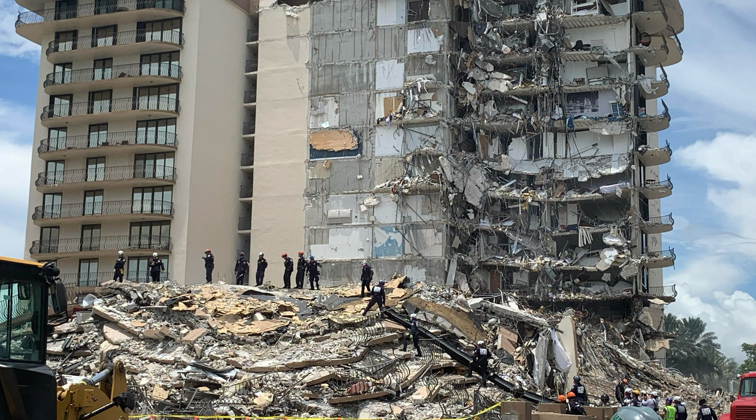Shortly after 1 a.m. on June 24, 2021, the middle and east parts of the Champlain Tower South condominium in Surfside, Florida, collapsed. Only the west part of the tower remained standing. 98 lives were lost in this tragedy.

The 136-unit condominium building stood 12 stories tall plus a penthouse, and it was built of steel-reinforced concrete. At ground level, a pool deck and a parking deck made up of concrete slabs were supported by columns over the basement of CTS. The building had stood on this stretch of the Atlantic coast since 1981. There was no obvious cause of the collapse, such as an explosion or a storm.

Within days, the National Institute of Standards and Technology launched a National Construction Safety Team investigation to determine the technical cause of the collapse. I'm Judith Mitrani-Reiser, co-lead of the investigation. And I'm Glenn Bell, co-lead of the investigation. In this presentation, we will provide a summary of our technical findings.

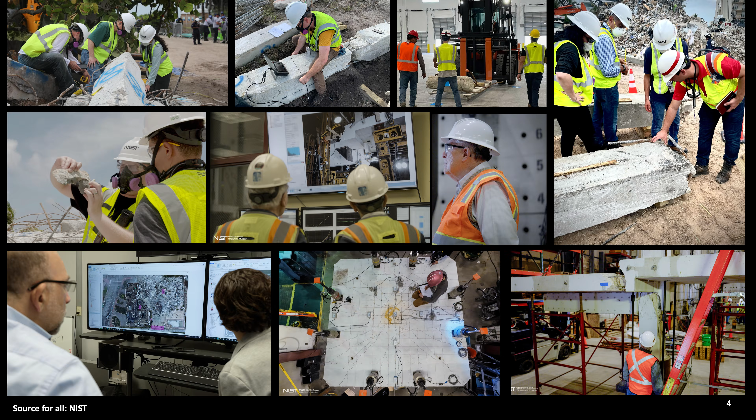Our team of experts has completed the technical portion of its investigation. This includes the analysis of physical evidence and historical records, as well as extensive interviews. We conducted materials testing and geotechnical studies. We built and tested building components like those within CTS and ran many computer simulations of the failure. We examined 24 possible scenarios for where and how the failure started.

Based on this extensive work, we have concluded that the failure most likely began in early June, about 3 weeks before the collapse, when two connections between garage columns and the pool deck slab failed. Once the first connection failed, other elements of the pool deck were left to carry their loads. But they were not strong enough to handle them due to problems that stemmed from the original design and construction of the building.

When building structures are designed and built to required codes and standards, they have margins against failure, meaning they should be able to support much more load than they are expected to bear. In the case of Champlain Tower South, these margins against failure were too narrow from the start.

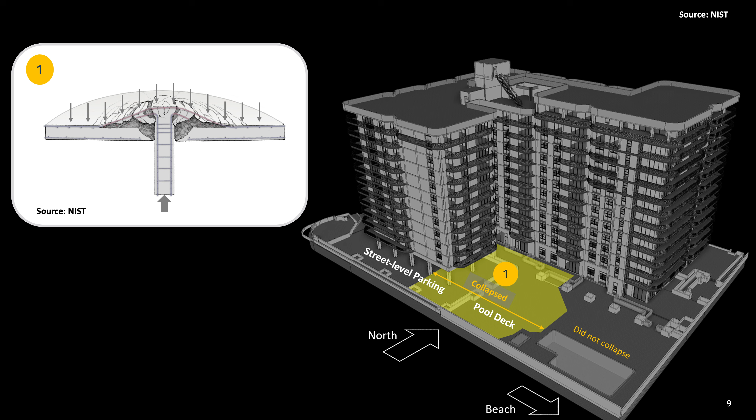NIST investigation revealed that the collapse of Champlain Tower South began with what are called punching shear failures. In this type of failure, the slab breaks around the column, giving the appearance that the column punched through it. It occurs when the load on the slab becomes great enough to cause it to bend and crack around the column, weakening the connection that is holding the slab in place.

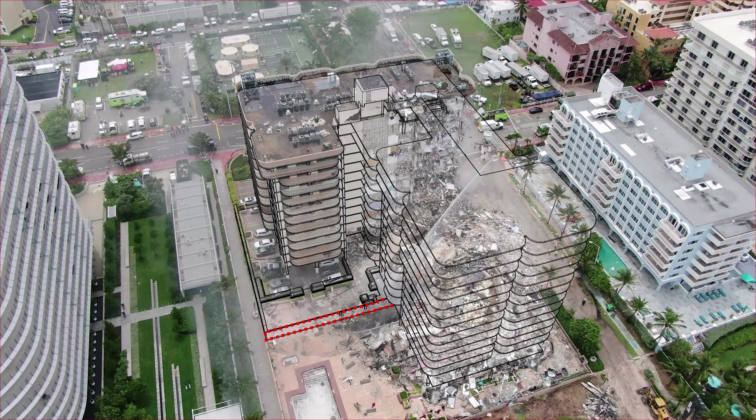After the first two slab column connections failed in early and in mid-June, respectively, the slab that they supported did not fall immediately. It was held up by the pool deck and street-level parking deck slabs surrounding it. When the connections between the pool deck slab and these two columns in the garage below failed, it increased the loads on neighboring connections, eventually causing them to fail as well.

The failure spread to other elements of the pool deck and street-level parking structure, eventually unseating the southern edge of the pool deck slab from a supporting wall. We believe this caused the slab to sag further and eventually break away from the face of the middle section of the tower, seen at the extreme right of this image. This left the slab resting completely on crushed cars and the garage floor below it.

There's no way to know precisely which path these failures took from the initial two punching shear failures, but this scenario we have described here is consistent with principles of structural mechanics, eyewitness accounts, and other evidence. Small variations in the sequence could also be consistent with structural mechanics and evidence.

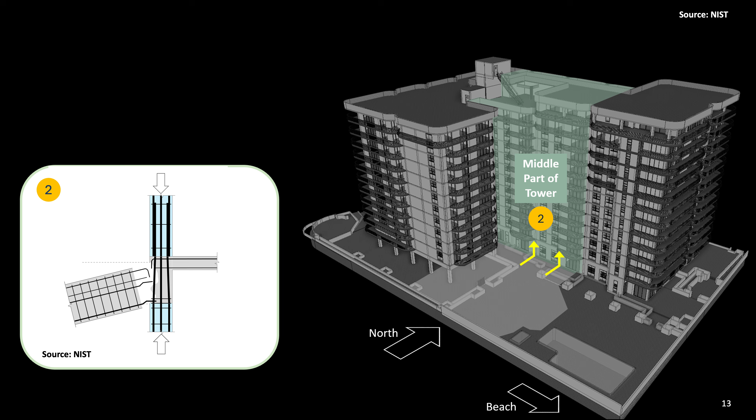Most importantly, when the pool deck broke away from the middle part of the tower on June 24, 2021, it damaged two connections. The damage weakened these joints, causing the failure to enter and spread through the middle part of the tower. Once the failure began in the middle part of the tower, it caused what's called a progressive collapse in the tower. The collapse progressed through the middle part of the tower and then to the east part.

Low margins against failure existed from the time Champlain Tower South was built, primarily caused by two factors. First, severe and widespread deviations in the building's original structural design from the codes and standards of the day, but also some limitations in those codes and standards. And second, deviation in the building's construction from the design drawings. Loads added to the structure over its life further diminished the margins against failure.

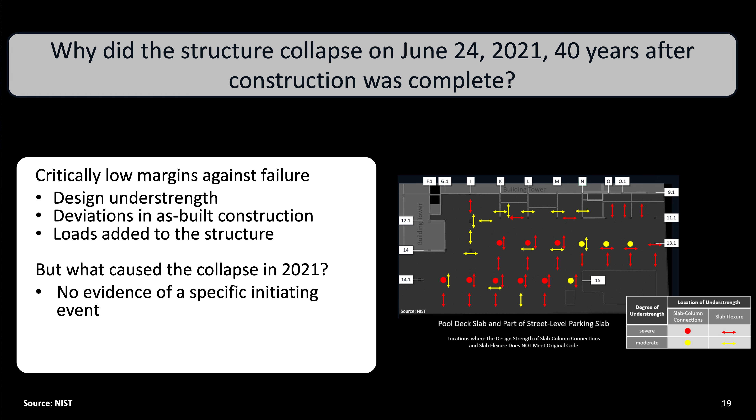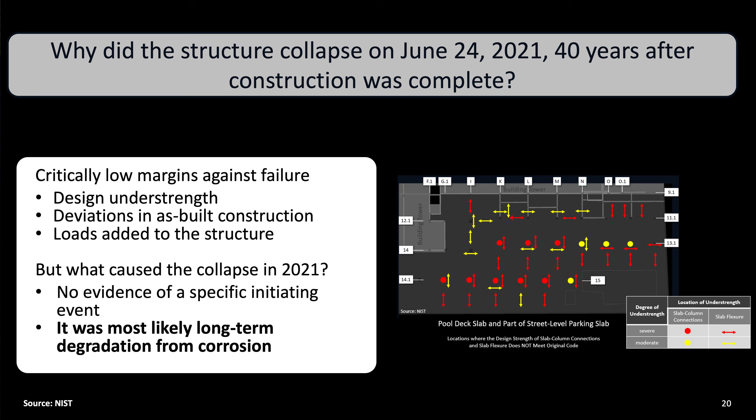But what caused the collapse in 2021? We found no evidence of any specific initiating event. The final factor that brought the critically low margins of safety to the point of failure was most likely long-term degradation from corrosion. While we have determined the cause of the collapse, our work is not done.

We continue to develop recommendations to improve the structural safety of buildings based on what we've learned. We will publish a report, as we have done for our previous investigations, which will include all of the technical analyses and our recommendations. We will then work to ensure that standards, codes, and practices are updated as needed.

Throughout this investigation, we have kept top of mind those who were most directly impacted by the collapse of Champlain Tower South. We appreciate everyone who has helped with this work, including the survivors and the families of those who were lost. With their invaluable input, this effort will help make other buildings safer and help prevent tragedies like this from happening again.

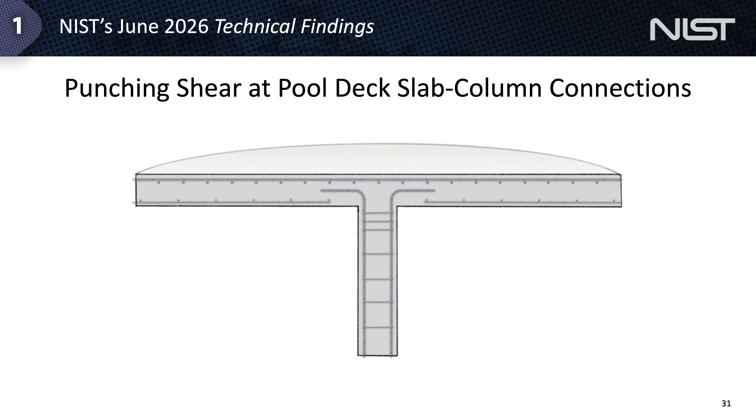I will now describe this type of failure with an animation. The first image shows the column supporting the slab. As the slab is loaded and the column resists the load, the weight of the slab and other things on it push the slab down. The column resists that load by pushing up.

The slab bends down around the column, opening diagonal cracks. As the load increases, one or more of the cracked surfaces widens to the point where it can no longer resist the load, and the joint fails. It loses most of its strength.

If other slab column connections adjacent to the failed connections have not failed, the adjacent columns may keep the slab from falling, as shown here. This was the case in the first connection failures I've described so far. But if there isn't support for the slab through adjacent connections, the slab will drop. It is as though the column punches through the slab.

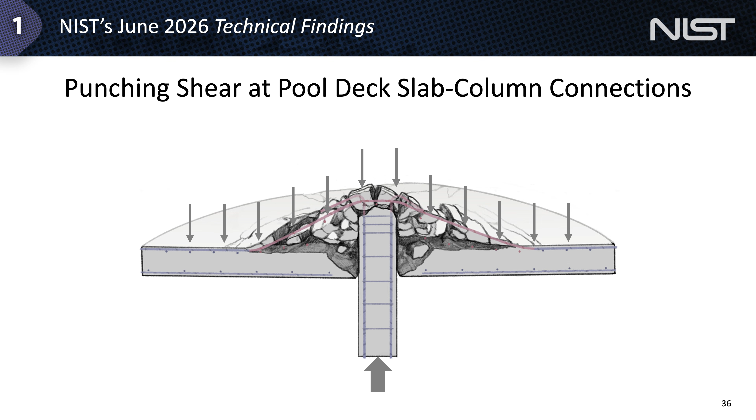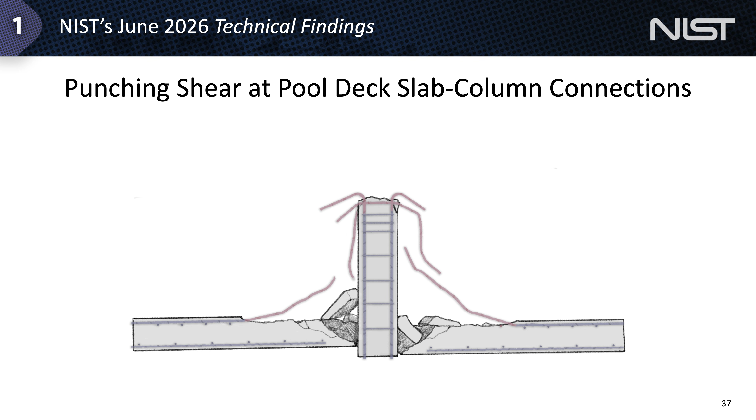The slab slides down the column, and as the slab slides down the column, the top layer of the slab reinforcement pulls down on the failure cone over the column, breaking it, and the concrete breaks apart as the slab continues to drop, until finally the slab drops to its final resting place. As the slab drops, the top reinforcement breaks the failure cone over the column, leaving the column's top and the hooked shape reinforcement as shown here.

When structural elements and connections are designed and built according to applicable standards, they are expected to have a large margin against failure, meaning that the expected failure load and deformation is well above the loads and deformations that are expected to occur in service.

But in the pool deck slab column connections of CTS, those margins against failure were 0 at the time of failure. After these two slab column connections failed in early June and by mid-June, the slab around these connections was able to remain standing for some time through a combination of bending resistance in the slab and flat arch action, technically called compressive membrane action. This behavior prevented immediate collapse.

However, when the first two slab column connections failed, the loads on neighboring slab column connections increased, causing them also to fail on June 24, 2021.

The failure spread through a large portion of the pool deck and adjacent street-level parking deck. I will now present a likely scenario of how failure could have initiated and progressed at CTS.

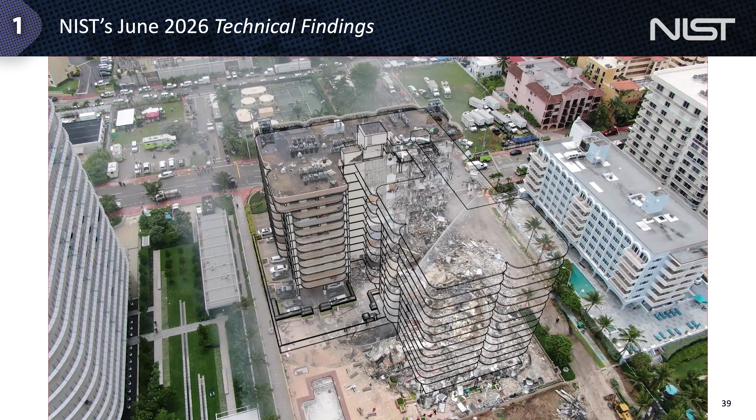The animation opens with this image of the collapse site, overlaid with an outline of the pre-collapse building shown in black. We highlight in red a slice of the pool deck and garage that we'll use as an example to demonstrate a scenario of the initiation and progression of failure. The scenario is consistent with principles of structural mechanics, eyewitness accounts, and other evidence, but it is not the only such scenario. There are other progression scenarios that are consistent with structural mechanics and the evidence.

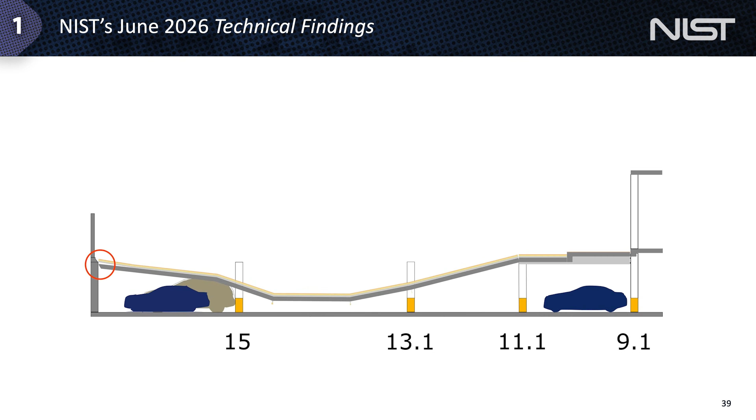We then zoom into the elevation view of the slice, showing an initial punching shear failure at grid line 13.1 and the sagging of the slab that follows. The failure spreads to neighboring slab column connections shown here occurring at grid line 15. In this scenario, the sagging grows, eventually unseating the southern edge of the pool deck slab from the wall, and then causing punching shear failures at slab column connections at grid line 11.1, which are strengthened by beams.

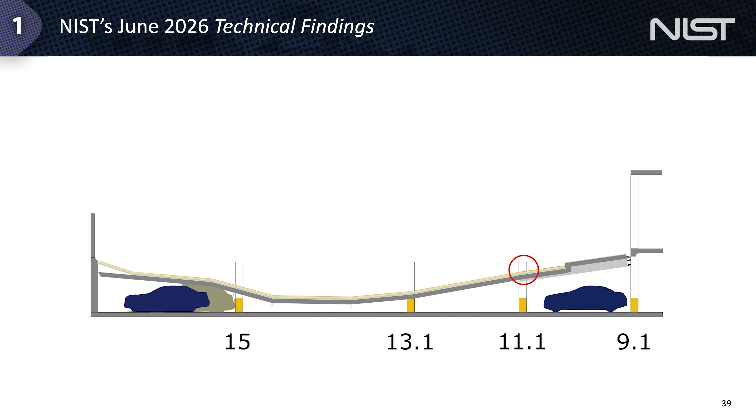The failure continues to spread north until it reaches the southern face of the tower, where sections of the concrete are pulled from the connections between the pool deck slab and the column towers. In this scenario, the slab ultimately rests completely on crushed cars and the garage floor below it.

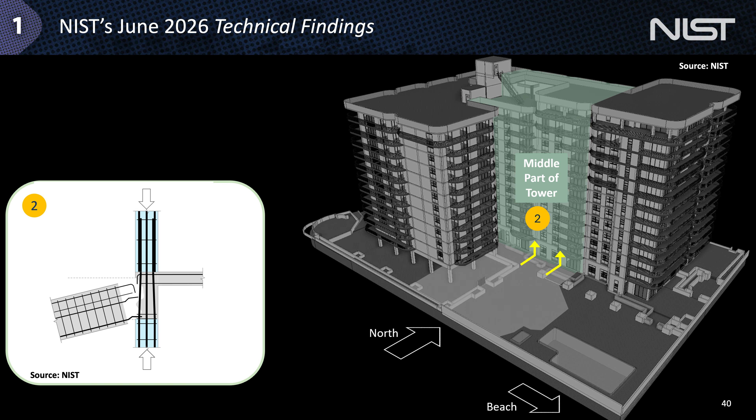When the pool deck slab and beam fully disconnect at its northern edge, where it meets the middle part of the tower shown here in green, it severely damages two critical structural connections where the pool deck slabs and beams join the columns and slabs of the tower. The damage weakens these joints, causing the failure to progress into the tower, shown with the two yellow arrows, and then spreading through the middle part of the tower in the area marked 2.

The downward movement of the collapsing floor slabs of the middle section of the tower pulls the east section toward the middle, causing the east section to sway back and forth. This swaying is initially restrained by a portion of the middle section of the tower. However, continued collapsing of the middle section allows the east section of the tower to sway westward until the capacity of the lower story columns is exceeded, and this section of the tower begins to fall downward.

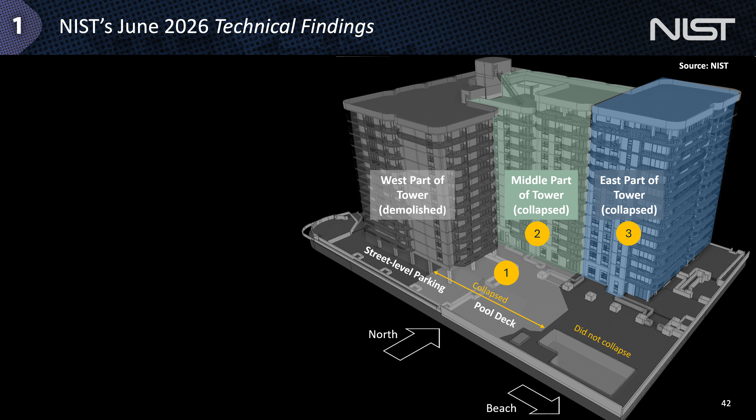Our team's meticulous studies of the physical evidence we collected, the observations shared by eyewitnesses and those familiar with the building, and the testing and the results of computational structural analysis has led us to determine the following most likely failure scenario for Champlain Tower South. First, the building suffered punching shear failures of slab column connections of the pool deck approximately 3 weeks, and then again 1 week before the tower collapsed.

The initial slab column connection failures eventually cause additional slab column connections to fail, causing a progression of collapse of parts of the pool deck and the street level parking, eventually unseating the pool deck slab at its southern edge.

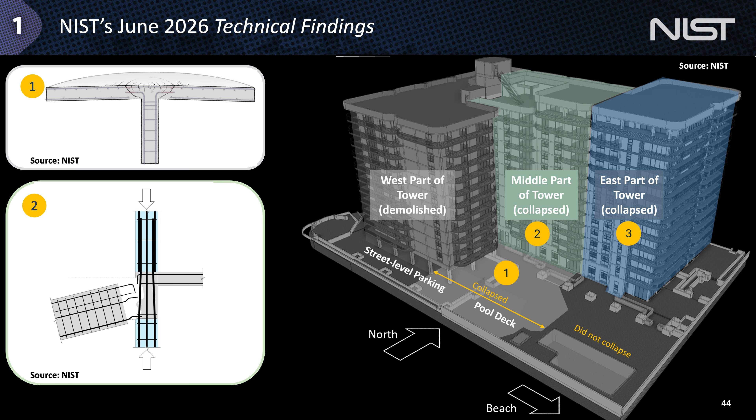And second, this failure damaged two critical joints where pool deck slabs and beams joined columns and slabs of the tower at the northern edge of the pool deck. The damaged connections crushed due to the loads on the columns, causing two tower columns to drop, and the failure to spread throughout the middle part of the tower. And finally, those failures progressed through the east part of the tower.

The next few chapters of our presentation will show how our team determined this most likely failure scenario and why Champlain Tower South tragically collapsed on June 24, 2021. We will describe the initiation and progression of failure of Champlain Tower South in three distinct chapters shown here.

Chapter 2 is focused on the initiation of failure of slab column connections in the pool deck and the progression of this failure through a large part of the pool deck slab and the street level parking slab. Chapters 3 and 4 are focused on progression of the failure into and through the middle and east parts of the tower and arresting at the west part of the tower. Chapter 2 will now address the failure initiation.

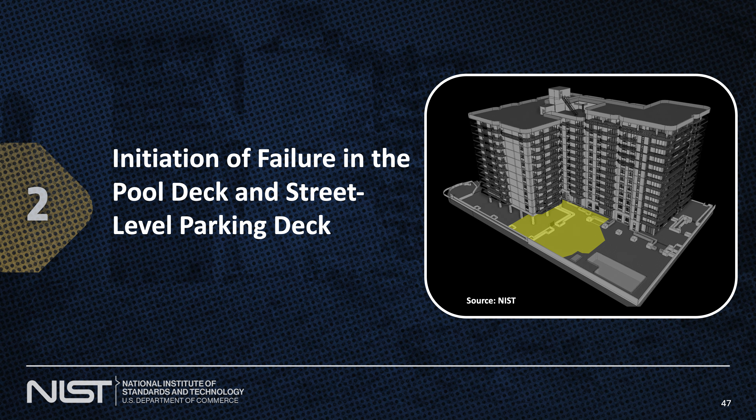In early June 2021, just 3 weeks before the failure of Champlain Tower South, eyewitnesses saw and captured in photos severe distress in a masonry planter wall and a planter box sitting on the pool deck. The location of this distress is shown on the left with a blue dot and arrow. The photo in the upper right shows distress 3 weeks before the building collapsed, including a long horizontal crack in the planter wall, identified here with a blue arrow. An enlargement below shows severe distress and displacement in the corner where the planter wall meets the planter box. Another photo of the same planter taken 14 months before this photo shows no distress. Therefore, significant movement occurred during this time period.

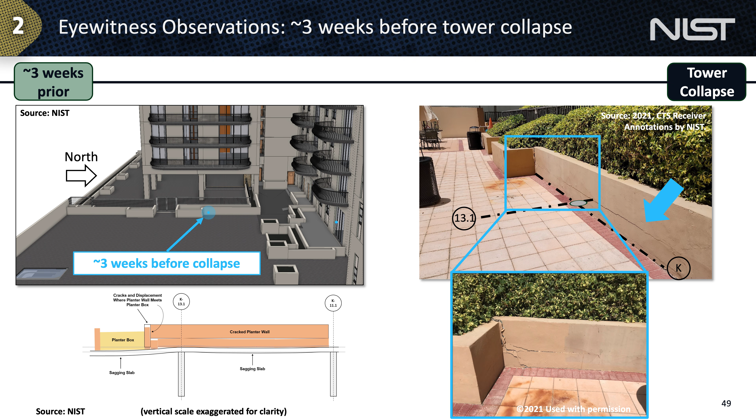The image in the lower right is an artistic rendering of what the eyewitness described to us. They reported that the northern portion of the gate shifted down vertically relative to the southern portion by less than half an inch. This view and subsequent similar views show parts of the pool deck structure, its slab column connections, and the basement columns.

At A, we see the slab column connection at grid point K13.1 near where that planter and gate were damaged. Our analysis of the building's design and its condition at the time of collapse, our testing and computational modeling of the structure, and the damage observed by eyewitnesses and documented in photographs indicates a punching shear failure at point A. The video clip in the lower left side is the same video shown earlier and demonstrates a likely scenario where the slab sags after the slab column connection failure.

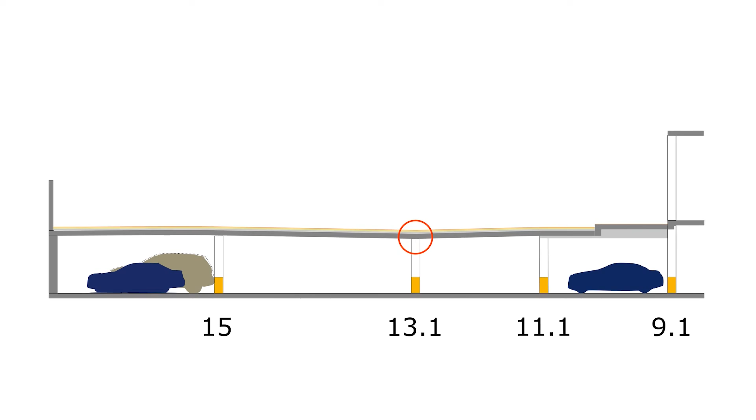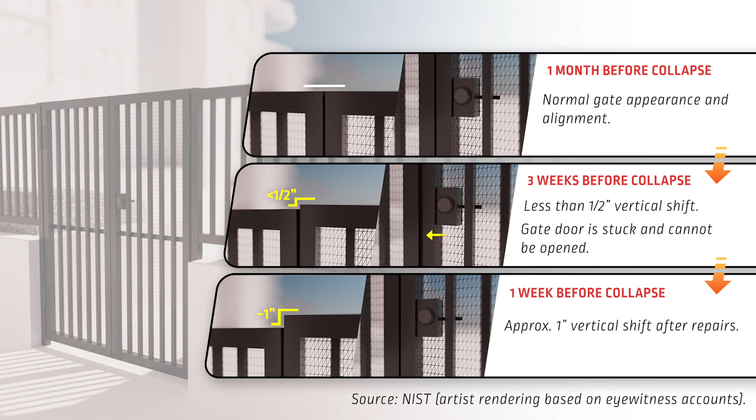Approximately 1 week before the collapse, an eyewitness reported a recurrence of the problem with the gate between the pool deck and street-level parking, which had again become jammed and unusable. The location of this distress is shown with the blue dot and arrow in the left-hand image. The eyewitness reported that this time the gate suffered a more significant vertical displacement downward. The northern portion of the gate displaced vertically down by approximately 1 inch relative to the southern portion of the gate. This observation is significant because this gate is adjacent to the planter box that, in the same period of time, showed severe distress and displacement prior to the failure on June 24, 2021.

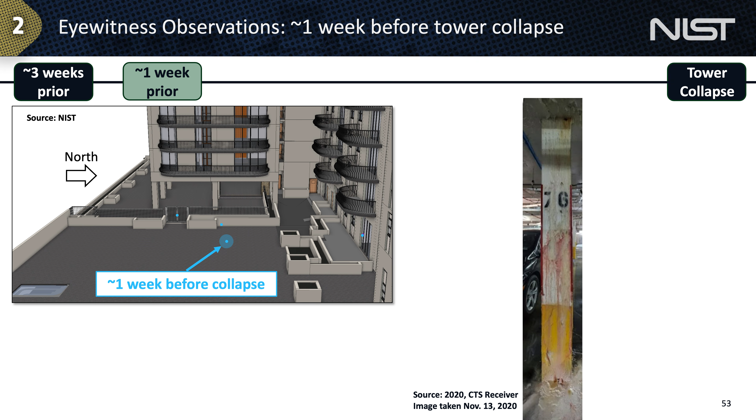Approximately 1 week before the tower collapsed, an eyewitness described the persistent water leaks in the ceiling of the garage drying up, and a sudden concentration of water began to flow down on all 4 faces of the column located due east of the planter that suffered damage just 2 weeks before. The location of this column at grid point L13.1 is shown with a blue dot and arrow in the left-hand image. The eyewitness shared that the flow of water increased daily and that there was a change in the height of the ceiling of the parking garage or the pool deck slab around the column.

After the 2 slab column connections punched 3 weeks and 1 week before the tower collapsed, the slab near the punched slab column connections did not immediately fall into the basement, but instead they moved downward likely 1 or 2 inches at the 2 points labeled A. The slab area shaded in gray was able to transfer the load borne by the punch connections labeled A to adjacent columns, shown here in orange and circled in the figure. This prevented an immediate collapse of the pool deck slab.

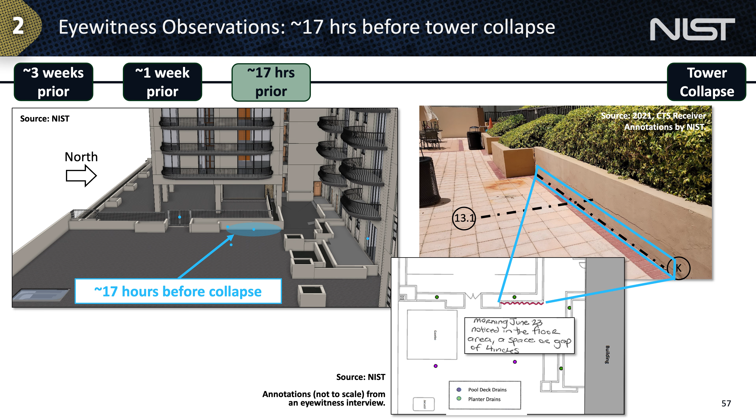The lower image is a drawing, not to scale, from the interview with the eyewitness, where the approximate location of the planter separation from the pool deck slab is shown with the pink line, and where the handwritten notes summarize the observation. Approximately 9 hours before the tower collapsed, one eyewitness described a leak coming through a crack in the garage ceiling that got progressively worse.

The eyewitness described the water leak had started as a drip, and that the bottom of the slab on the east side of the crack was lower than the west side.

The area where this leak formed is in a part of the garage that historically leaked and was repaired over the years. The lower image is a drawing, not to scale, from the interview with the eyewitness.

In summary, eyewitnesses observed damage to the planter box and the gate near grid point K13.1 approximately 3 weeks before the collapse. Two weeks later, more severe damage is again observed in the gate separating the street-level parking and the pool deck, and water is observed being funneled down the column at grid point L13.1.

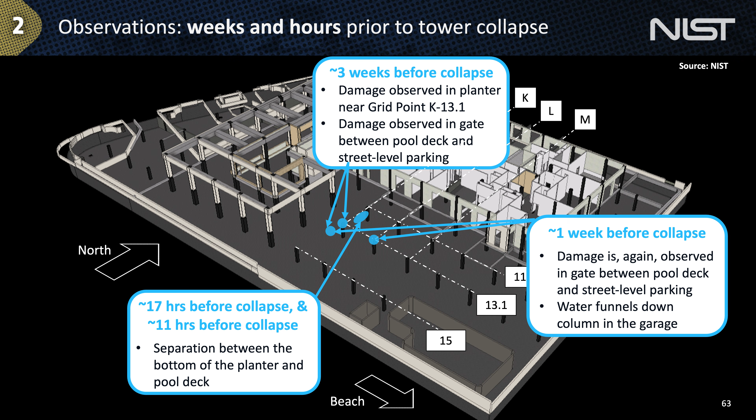Then 17 hours before, and again 11 hours before the collapse, one eyewitness notices a separation between the planter and the pool deck. Then 9 hours before the collapse, a water leak is observed in the garage. This leak worsened and was described as a faucet pouring water into the garage just 3 hours before the tower collapsed.

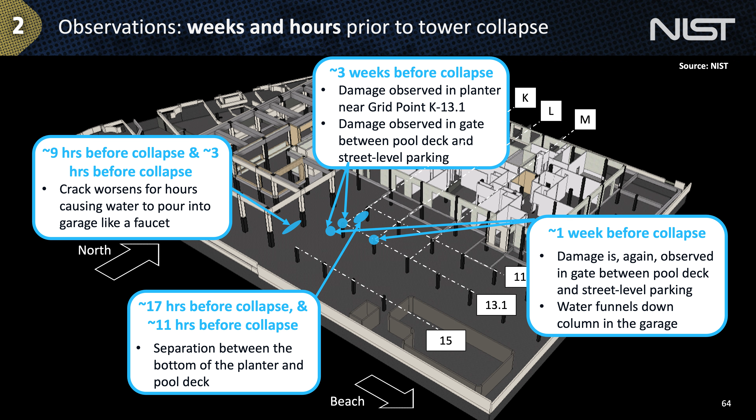Any fallen slabs in the garage would have been observed by any of the eyewitnesses who walked in this part of the garage. However, none of the eyewitnesses in the garage and other parts of the building observed fallen pool deck or street-level parking deck slabs 9 minutes before the tower collapsed.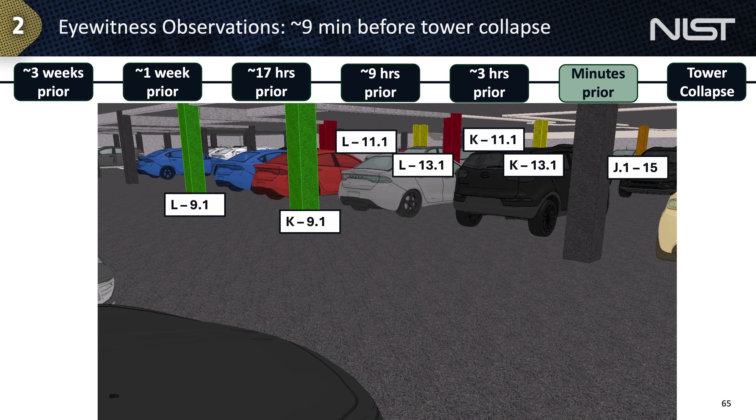Instead, several eyewitnesses reported hearing concerning sounds approximately 8 to 9 minutes prior to the tower collapsing. These sounds, heard from various locations in the building, are described as crackling sounds or as sounds associated with building renovations.

Approximately 7 minutes before the tower collapsed, the building's own fire alarm logged a trouble signal, with no further description or details in the log.

At approximately 6 minutes prior to the tower collapsing, several eyewitnesses, some already awake and some awakened by the activity in the pool deck area, saw the street-level parking collapsing or fully collapsed. One eyewitness described seeing the cars at the street-level parking deck in a strange position, almost as if they were tilted down. Prior to observing the cars, one eyewitness heard metallic screeching sounds, possibly associated with the cars shifting.

Another individual observed the street-level parking collapsed into the garage. Several individuals recalled hearing car alarms going off around this time.

The aggregated areas visible to all individuals who reported witnessing the collapsed street-level parking is shown in green. It is possible that the slab was progressively collapsing east of the street-level parking deck, but no eyewitnesses had lines of sight that far east during this time.

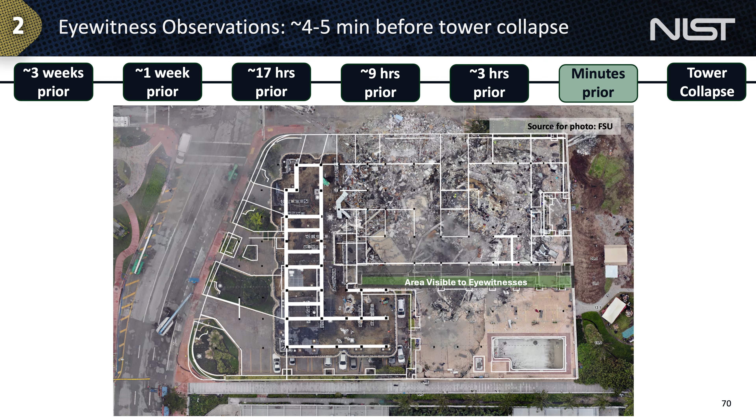The video shows the slab and beams tugging at the joints of the slabs, beams, and columns at E, and eventually the slab and beams breaking off these joints and pulling some of the joint concrete away with it. The video also shows how this scenario is consistent with multiple eyewitness accounts, indicating the pool deck collapse generally proceeded from south to north.

There is no way to know precisely which path these failures took from those initial two punching shear failures, but the scenario we have described here is consistent with principles of structural mechanics, eyewitness accounts, and other evidence. Small variations in the sequence could also be consistent with structural mechanics and evidence.

However, all variations involve the spread of the failure from the two initial slab column locations to other slab column locations, unseating of the slab from the south wall, and the northward collapse advancement of the pool deck and street level parking slabs, which then initiated the collapse of the middle part of the tower.

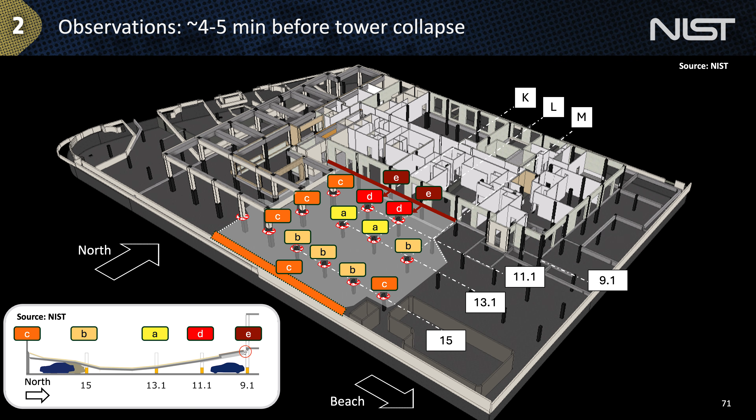At this time, several building residents hurry through the lobby, briefly exchanging their experiences with one another and trying to understand what is happening in the building.

A few individuals walk out of the lobby and towards the street-level parking area to get a closer look at the partially collapsed parking deck and the sunken cars. At this time, several eyewitnesses also report hearing car alarms.

One eyewitness standing north of Champlain Tower South captured the partial collapse of the pool deck in a video. A single frame of this video at 1:18 and 18 seconds a.m., approximately 4 minutes before the tower collapse, is shown here. Our team used super resolution analysis to clarify and sharpen objects, with contrast and brightness enhancements also made.

Debris on the parking garage floor is observed in this enhanced video and demonstrated in this image. Flashing lights from a car alarm triggered by the impact can also be seen reflected on the eastern wall of the garage ramp in this video.

We've just described the how of the collapse of the pool deck and street-level parking deck. What about the why? What caused slab column connections in the pool deck and street-level parking to fail? The causes are multiple, and the bulk of them happened at the time of original design and construction.

As we reported in previous updates, NIST contracted with an experienced structural design firm to prepare an independent check of the original structural design of CTS for conformance with both codes and standards that applied at the time of original design and construction and against codes and standards that would apply today.

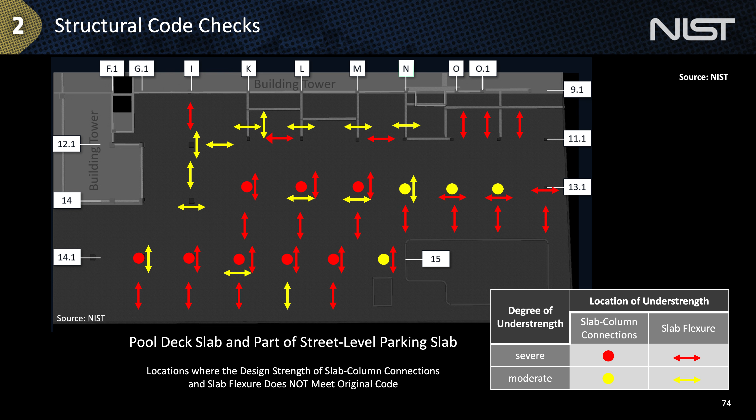We found that the top layers of reinforcement in the pool deck and street-level parking slabs were not placed at the elevation specified on the structural engineering drawings. Our measurements of the pool deck specimens removed from the collapse site showed that the cover was generally about 2 inches rather than 3/4 of an inch shown on the drawings. This deviation, while seemingly minor, significantly diminishes the strength of the slabs and the slab column connections.

As illustrated on the left, the design drawings required that at least 25% of the top of slab reinforcing for the area near columns, known as column strips, was to pass over the column. We found that typically less than 25% of the reinforcement passed over the columns.

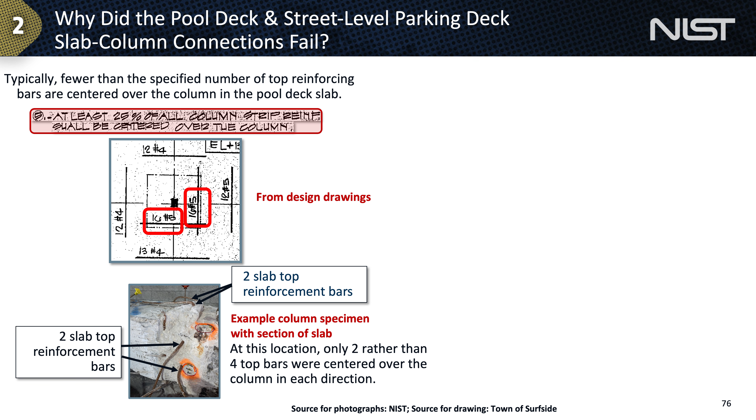An example is shown on the left. The highlighted red rectangles in the image from the design drawings show that there were to be 16 bars in the column strips in each direction. Therefore, 4 bars were to pass over the column in each direction. The bottom left photo shows an example where only 2 bars in each direction passed over the columns, half the number required.

On the right, we found that the spacing of the top reinforcing bars in the areas of the pool deck slab near columns ranged from about 20% to 40% wider than required by the structural design drawings, resulting in less reinforcing in the area of the slab near columns than required by design. Both these deviations significantly diminish the strength of the pool deck slab and slab to column connections.

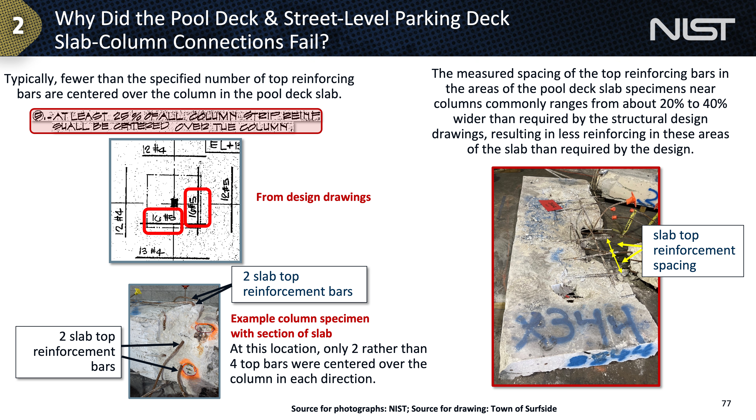Records of whether these changes were approved by the design engineer or observed by inspectors in the field are not available. The final construction of landscaping features on the exterior slabs of CTS varied from the design drawings.

Cracking, leakage, and evidence of reinforcement corrosion caused the condominium association to undertake a major rehabilitation of the pool deck 15 years after the building was constructed.

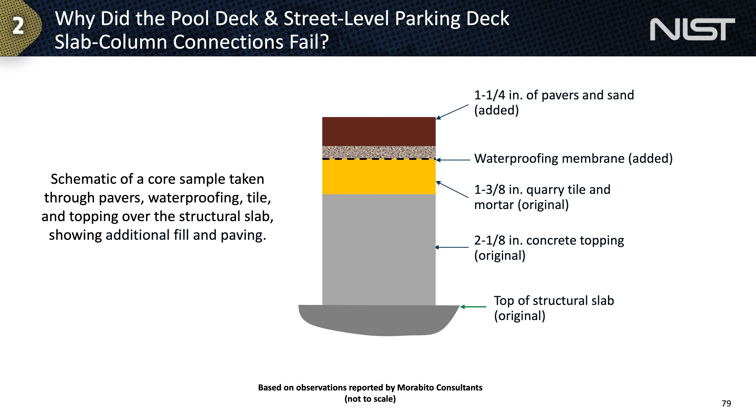The rehab involved removing most of the original quarry tile, although some quarry tile was left in place as shown in the core sample schematically illustrated here. A membrane was placed over the original sloping concrete topping. New pavers on a sand setting bed were added. The new pavers and sand added load to a system that was already structurally inadequate.

Evaluating the actual loads and deformations under which the slab column connections would have been expected to fail has been extremely challenging. This is an exercise in establishing the loads and other conditions that existed at the time of failure - we call this the demand at the time of failure. It's also an exercise in establishing the expected failure strength and deformation of the connections at that time - we call this the capacity. When the demand exceeds the capacity, failure is expected.

We described in earlier updates the meticulous work of our team in evidence collection, testing, and analysis that has informed this determination of demand and capacity, such as examination and measurements made of the hundreds of physical specimens retrieved from the collapse pile, material testing, geotechnical tests and analyses, and study of the 40-year history of CTS. All of this informs the analysis described in the next several slides.

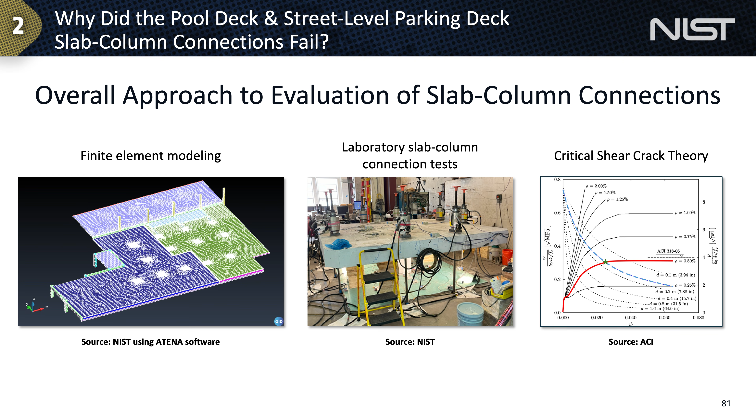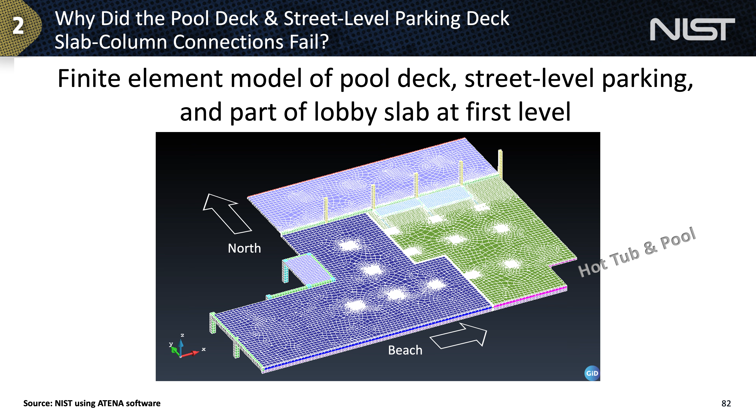We used high-fidelity finite element modeling to determine the loads on the slab column connections and the deformations of the slab at each of the connections. These models capture geometric and material nonlinearity and include effects of shrinkage, creep, corrosion of reinforcement, and in-plane stresses from the restraint of dilation of the slab.

As part of the investigation's structural laboratory test program, NIST contracted with a U.S. university with special expertise in load tests of concrete structures to build and load test to failure 8 full-scale replicas of typical CTS pool deck slab column connections. The specimens included replicas of a portion of a column supporting the pool deck and a section of the slab, 10 foot 6 inches square.

The specimens were built as faithfully as possible to replicate the conditions existing in CTS at the time of failure. This included reproducing concrete mixture ingredients and proportions with aggregates used to make the concrete from the same source in the Miami area believed to have supplied aggregates for the original construction of CTS. The specimens were loaded by 8 hydraulic jacks, arranged around the slab perimeter, simulating the loads on the connection.

we intentionally corroded the top reinforcement of some of the specimens to a target degree. The left-hand image shows a salt water bath and electrodes at a patch of slab over the column of the test specimen used to induce corrosion in the reinforcement. The right-hand image shows corrosion of the reinforcement at the end of a test.

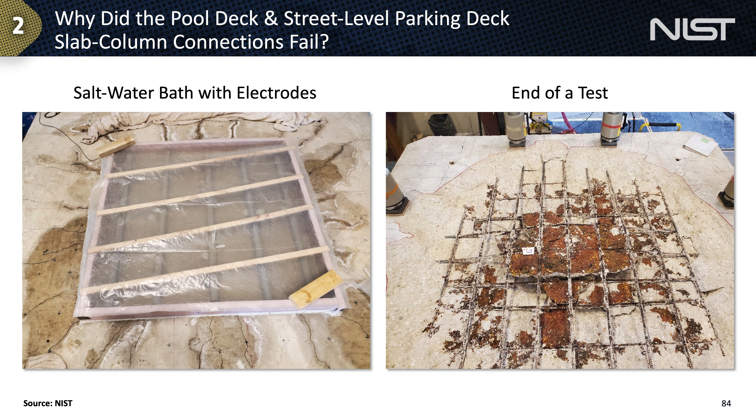We used critical shear crack theory, or CSCT, the basis for the punching shear provisions in European codes, to determine where demands on the slab column connections may have exceeded their capacities. In U.S. codes, CSCT is also used to determine the minimum area of reinforcement over slab column connections.

The demand on the connection is represented by the blue load rotation curve shown on the graph. This is determined from our finite element analyses. The capacity is represented by the failure criterion shown in red, which is determined by the CSCT, our laboratory test results, and the degree of any corrosion in the steel reinforcement.

If the calculated blue load rotation demand curve intersects the red failure capacity criterion, considering uncertainty in both, then failure is predicted. Our analysis shows that multiple compounding causes and contributors led to failures in slab column connections in the pool deck and street-level parking slab. The most significant of these factors stemmed from the time of original design and construction, and therefore were baked in before the building was even occupied.

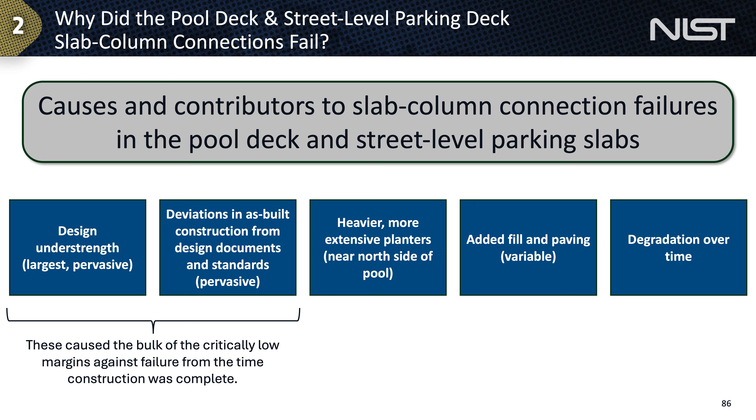But it's important to recognize that the first two of these, design understrength and deviations in the as-built construction, caused the bulk of the critically low margins against failure from the time construction was complete.

We'll now move to Chapter 3, Progression of the Failure into the Tower.

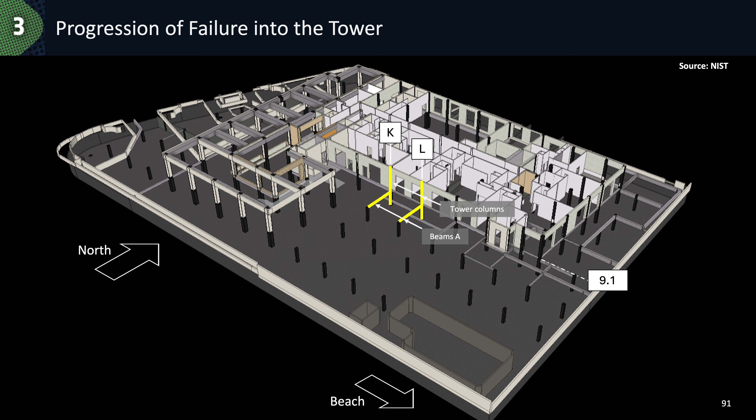In that collapse, sections of slab and two embedded beams, known as beams A, at grid lines K and L, and highlighted in yellow, separated from the tower. Here's another view of the beams A and how they joined the basement and first-story columns of the tower at grid lines K and L.

This is a view from near the end of the pool deck collapse sequence that we showed. It illustrates the conditions at the two joints K and L. We see a collapsing beam A and slab between grid lines 11.1 and 9.1. At grid line 9.1, the beam A and slab section separates from the slab beam column joint, pulling the beam and slab reinforcing and sections of concrete out of the joint and damaging it.

This substantially weakened the joint at grid line 9.1, which was bearing the load of 13 stories of structure from the column above. The two slab beam column joints had two vulnerabilities that made them susceptible to failure when the pool deck slab beams broke away from the joints at grid points K 9.1 and L 9.1 in the pool deck collapse.

The concrete of the slabs and beams of the floor system, shaded in gray, had a lower design strength than the columns above and below it. This made the floor concrete susceptible to crushing.

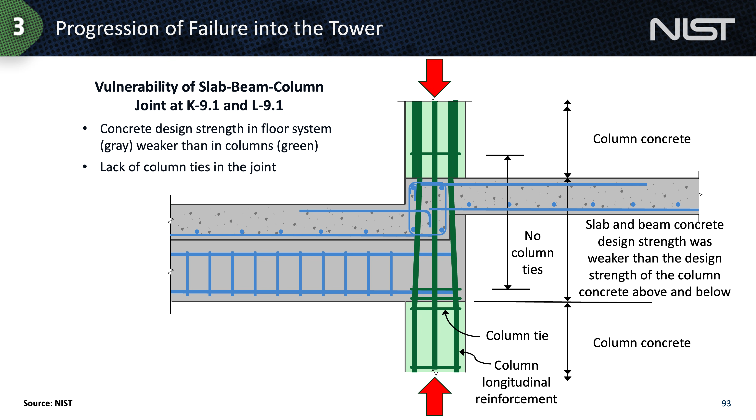There were no column ties in most of the floor concrete region of the joint to balance the pulling forces of the collapsing pool deck and prevent buckling of the longitudinal column reinforcement. The specimens we built for the laboratory testing of these joints included both of these vulnerabilities.

On the left, the beam A with the pool deck slab above breaks away from the slab beam column joint, damaging it. The right shows a view from the top side of the laboratory test specimen, showing damage to the joint. After the beam and slab broke away, the slab beam column joint lost strength and the column started to drop.

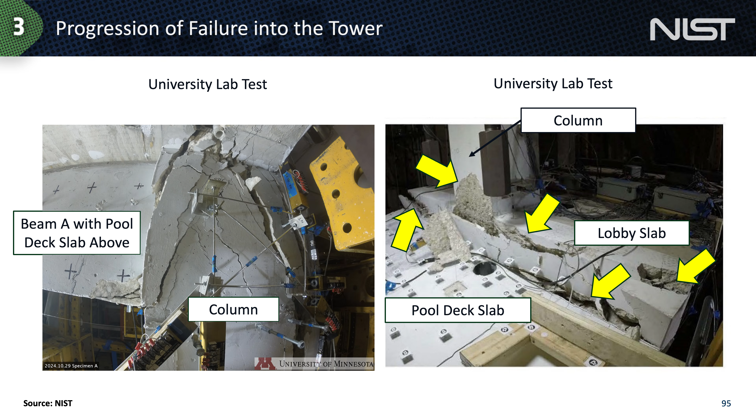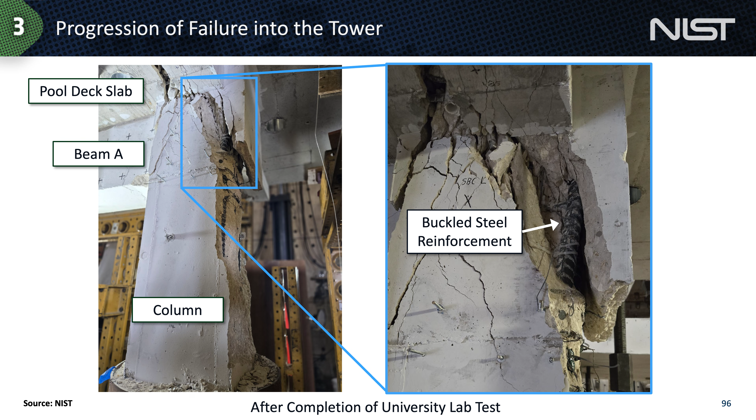Here is the laboratory specimen after the test. The steel reinforcement in the column had buckled. For safety reasons, the test was stopped after the column dropped a small amount but had lost load-carrying capacity.

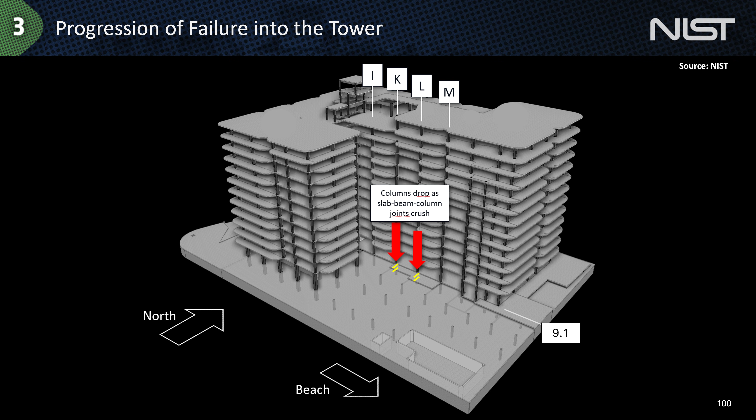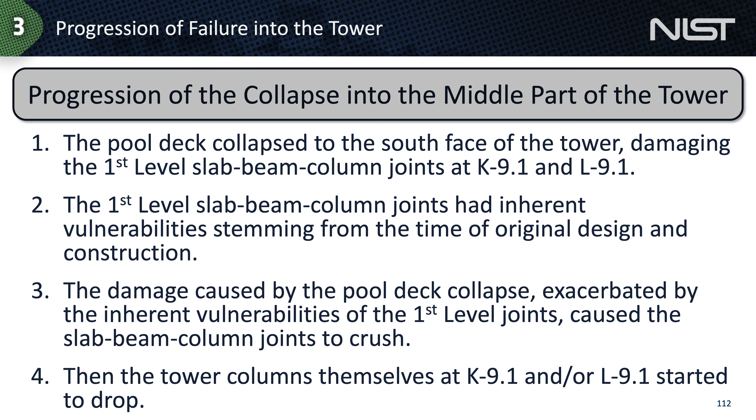Chapter 4 will now address the spread of the failure through the tower, addressing first how the collapse spread through the middle part of the tower and then the east part of the tower. In previous updates, we described our analysis of footage from a security camera inside one of the units in the 11 stack of Champlain Tower South.

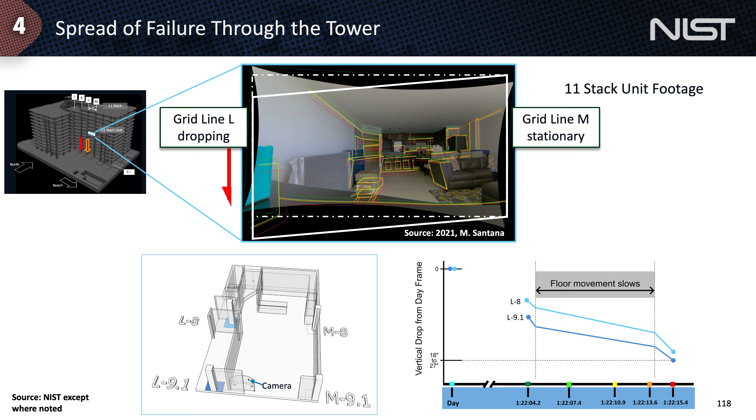The drop shown is from 1:22:04 a.m. to 1:22:15 a.m., and represents the total drop from a video frame taken the day before the collapse. Note that some of the drop already occurred between the day frame and the start of the measured drop shown in this graph. The slab near column L9.1 dropped more than the slab at L8, and the rate of drop increased dramatically at about 1:22:14. The total drop near grid point L9.1 from the day before the collapse to 1:22:14 a.m. was about 18 to 27 inches.

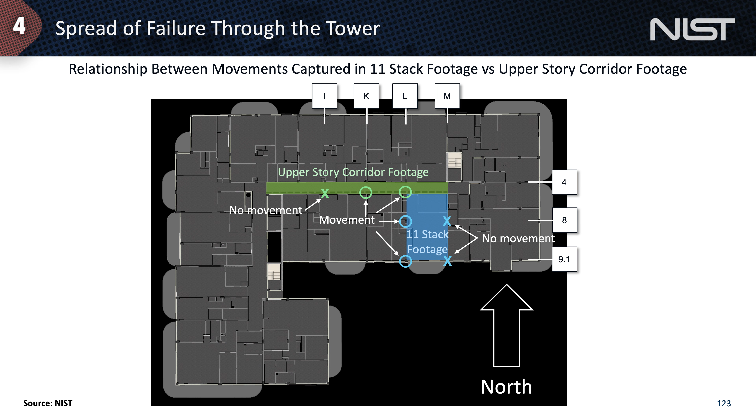This shows the relative locations in a plan or bird's eye view of the movements we can see in the 11 stack footage, shown in blue circles, and the upper story corridor footage, shown in green circles. Locations marked X are not moving. While the corridor footage is taken at a different floor than the 11 stack footage, the movements are in similar floor areas when viewed from above. They tell consistent stories about where in the building movements were occurring.

How did the failure progress horizontally? It's not clear whether the columns at K9.1 and L9.1 started to drop simultaneously, or whether K dropped before L, or whether L dropped before K. Regardless, the collapse progressed from south to north in the middle part of the tower by progressive punching shear failures at the columns.

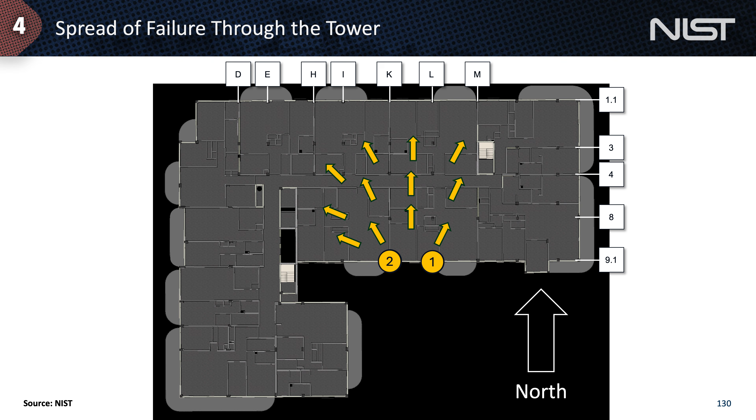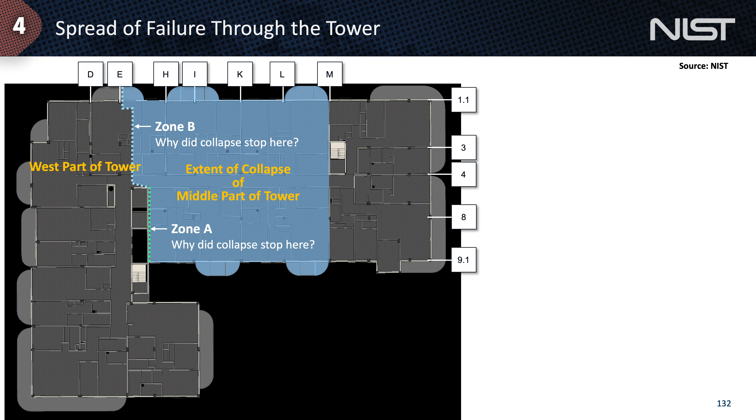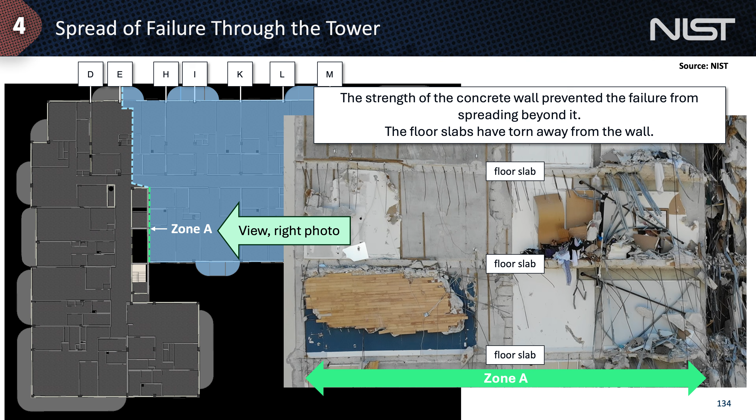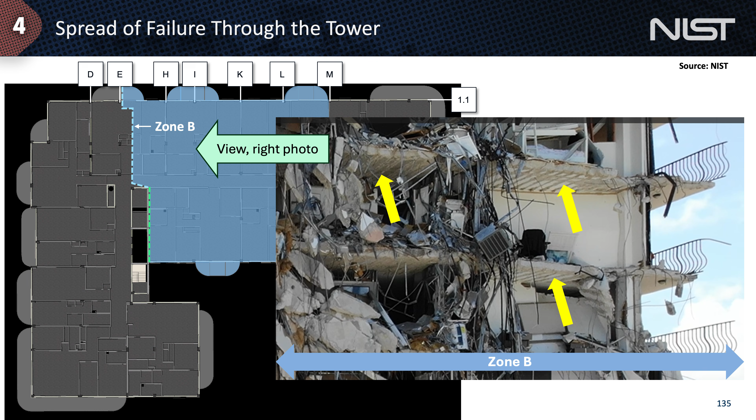The condition at Zone B is more complicated. The yellow arrows highlight stripes in the bottoms of the slabs—these are areas where the steel reinforcement bars tore out of the bottom of the slabs. The next few slides show how this happened.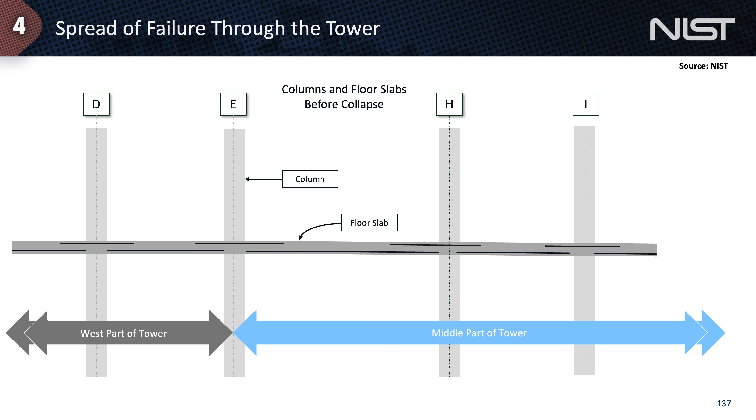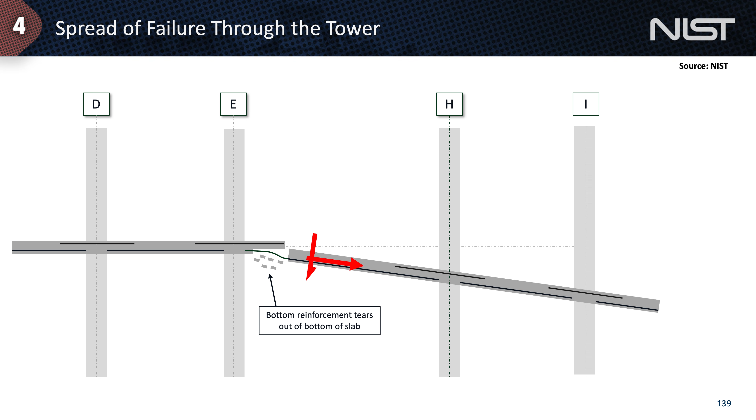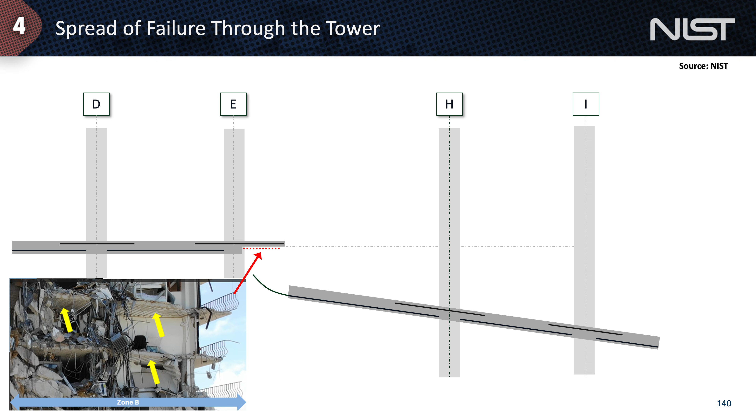The slab first failed in the section of the slab that has no top reinforcement, near the end of the reinforcement, where it was weak in bending. Following this failure, a strong downward force was exerted on the bottom slab reinforcement on the left-hand side of the break, and that downward force caused the bottom reinforcement to tear out of the bottom of the slab. The slab to the right of the break continued to drop. On continued dropping, the reinforcement completely separated from the bottom of the slab near the column at E. The stripes visible in the bottom of the slabs are where the bottom steel had torn out.

To summarize the collapse of the middle part of the tower: First, columns at grid points L9.1 and K9.1 started to drop from damage to the first floor joints caused by the pool deck collapse, and some of their loads were transferred to other parts of the structure.

Second, this initiated punching shear failures at the slab column connections as the collapse progressed to the north. Third, the collapse arrested where the middle part of the tower joined the west part because the resistance of the slab support at the concrete wall and the punching shear strength at the columns at grid line E were stronger than the resistance of the floor slabs themselves.

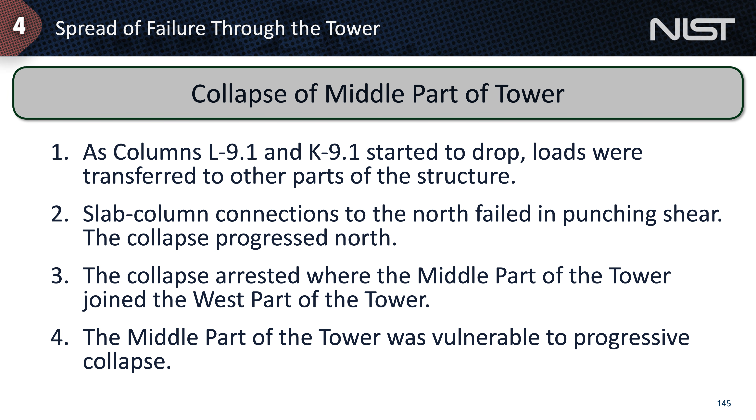Fourth, the middle part of the tower was vulnerable to progressive collapse. So how and why did the collapse then spread from the middle to the east part of the tower?

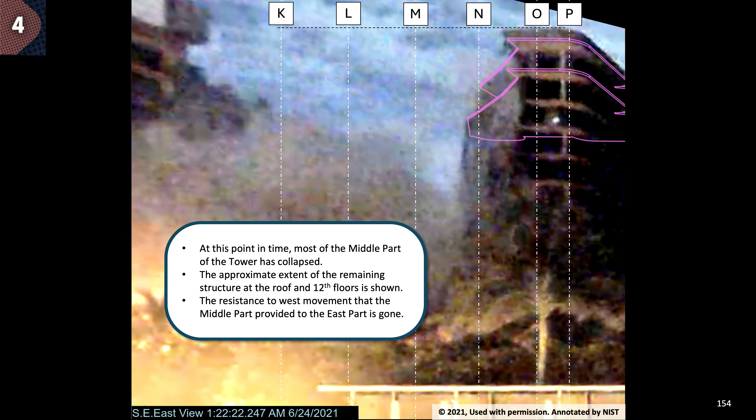The now collapsed middle part no longer provides resistance to the western movement of the east part. With no resistance to further side sway from the middle part of the tower, the east part continues to sway to the west. At this point, the 12th floor has moved west about 21 inches.

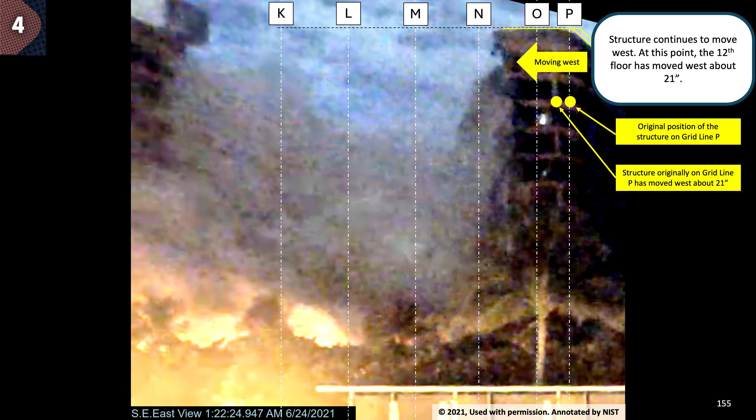In summary of the collapse of the east part of the tower: the collapsing middle part of the tower created and then released a westward pull on the east part, resulting in oscillation and a large side sway known as drift to the west. This large drift caused columns in the lower stories to fail.

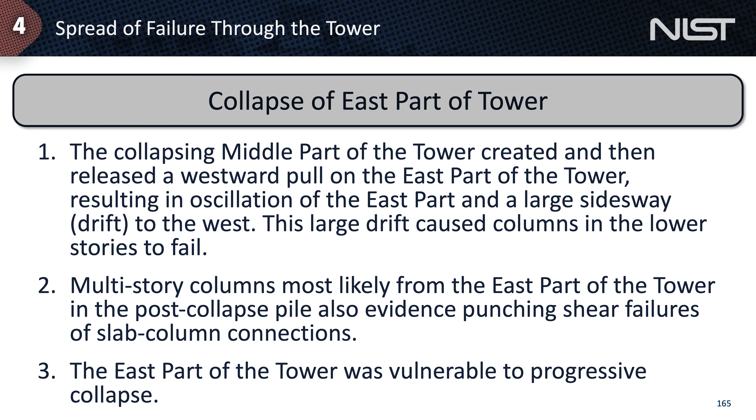In Chapter 5, we'll discuss some additional points of inquiry of our investigation, including the questions of why the collapse occurred when it did, and what factors did not contribute significantly to the collapse of Champlain Tower South.

An important question of this investigation is why the structure collapsed on June 24, 2021, 40 years after construction was complete. While problems stemming from the time of design and construction, and loads added to the structure, created critically low margins against failure in parts of the pool deck, these factors alone do not fully explain a failure in 2021.

We found no evidence of any specific discrete initiating event, such as sudden overloading or trauma to the structure, on or just before June 24, 2021. We studied the potential sources of long-term degradation that reduced the already thin margins against failure to zero.

We believe the first punching shear failure occurred in early June 2021, when significant distress in the planter walls and planter box was noted. That distress is consistent with failure of the slab column connection at grid point K13.1, and we believe that corrosion was the primary degradation mechanism.

Expanding on the assessment that corrosion of steel reinforcement of the pool deck slabs is the most likely scenario for long-term degradation of the pool deck structure, we know that corrosion of reinforcing steel was evident more than 25 years before the collapse and had progressed to the point that structural repairs and waterproofing were conducted in 1996 and 97.

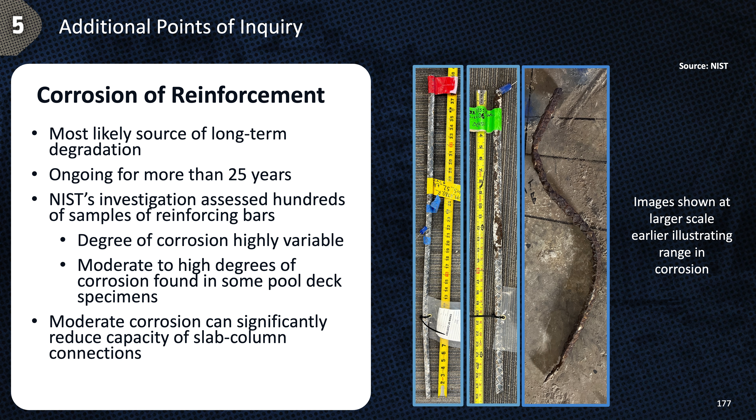Both our structural laboratory tests and published reports of tests by others show that moderate corrosion can significantly reduce the capacity of connections. It is well known that when concrete is loaded to high levels of stress near its failure level, it may not fail immediately, but may fail after a period of time, even if the loads are unchanged. This is called delayed failure under sustained loads.

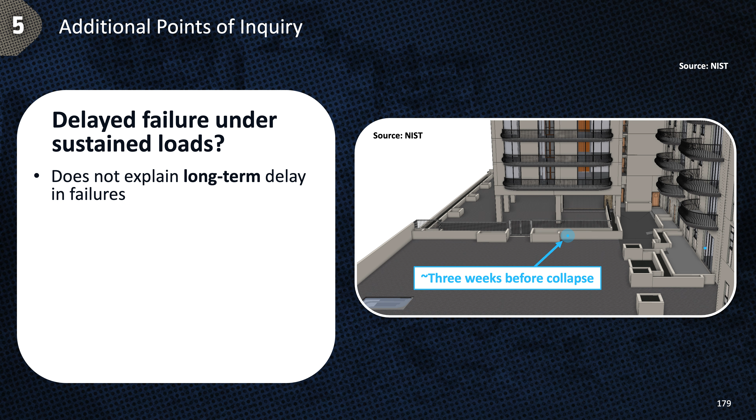This phenomenon does not explain the very long-term delay in failures between the time of original design, construction, and the subsequent application of loads to the pool deck, to the time of the partial collapse.

However, once the slab column connections failed at grid point K13.1 in early June and grid point L13.1 in mid-June, the stresses in the system were changed, and sustained load effects may have been a factor in the specific day the collapse occurred, that is June 24, 2021.

Sustained load effects also could explain the several-minute delay between the end of the pool deck collapse and the collapse of the tower. Things that most probably did not contribute significantly to the collapse include vibrations from the construction of 87 Park.

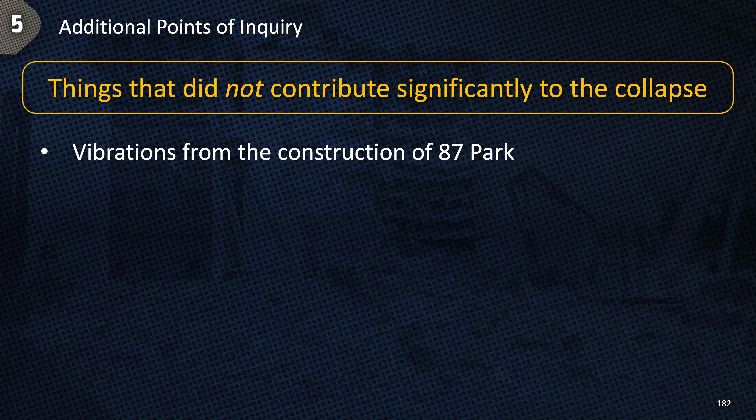87 Park is an 18-story luxury condominium built just south of CTS and completed in 2019. The northern boundary of the soil excavation for the construction of 87 Park was close to the southern boundary of CTS.

To support the basement excavation for 87 Park, steel sheet piles were driven into the ground using a vibratory hammer rig approximately 9 feet away from the south basement wall of CTS.

To evaluate the potential structural damage to CTS from vibrations, we investigated the conditions of the soil, rock, and foundations and superstructure of CTS, studied the history of the construction of 87 Park, obtained records from accelerometers of ground vibrations near the south wall of CTS during sheet pile driving, conducted non-destructive testing at the building to establish the damping and attenuation properties of the subsurface conditions, and created and ran numerical simulation models for the soil, rock, foundations, and superstructure to establish levels of vibration in various parts of the structure.

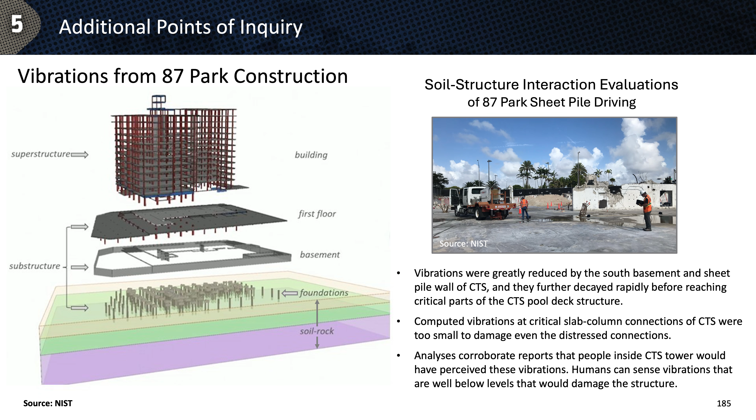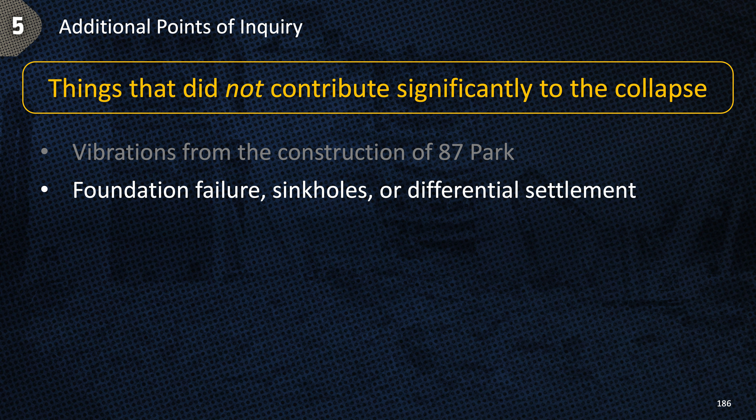Humans are very sensitive to vibrations and can sense levels of vibration well below those that would damage even a fragile structure. Other things that did not contribute significantly to the collapse include foundation failure, sinkholes or differential settlement, hurricanes and storm surge effects, impulsive loads such as vehicle impact, explosion, or items dropped from a crane, and accidental loads or overloads caused by the roof repair and roof anchor project ongoing at the time of the collapse.

The collapse of Champlain Tower South was one of the most tragic building failures in U.S. history. We have therefore worked diligently to fulfill the charge of our investigation, to determine the most likely technical cause or causes of the failure, to recommend specific improvements to building standards, codes, and practices based on the findings made, and to recommend any research and other appropriate actions needed to improve the structural safety of buildings.

We have so far determined the most likely technical causes of the failure, and we can now focus on finalizing our recommendations. Building codes require that building structures be designed and built to have large safety margins to prevent failure. A structure's margin against failure is defined as the extra capacity the structure and its elements possess beyond the loads that are expected to be placed on it.

Champlain Tower South did not have those large margins against failure. Problems in its pool deck structure stemming from the time of original design and construction meant that parts of the pool deck had very low margins against failure. Champlain Tower South was therefore a very vulnerable building from its earliest days.

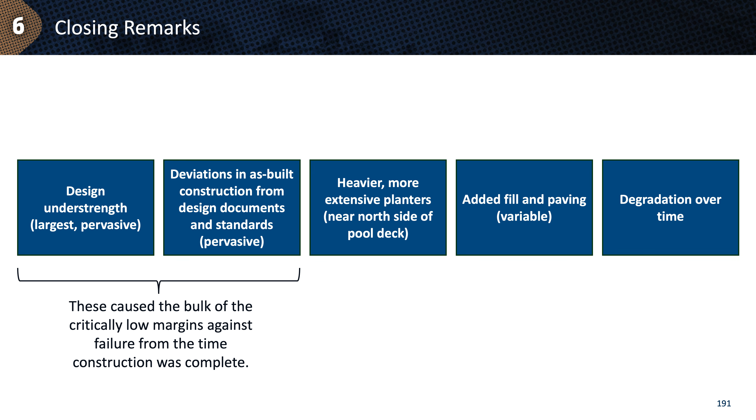While it was the low margins of safety and degradation that started the failure in the pool deck, it was insufficient strength and reinforcement detailing at the connection between the pool deck and the tower that caused the deadly partial collapse of the tower.

In our final report, in addition to our principal findings on the technical causes of the partial collapse, we will provide all of the analysis of evidence, test results, and computational modeling that supports the team's findings. Our final report will also include recommendations for changes to codes, standards, and practices, further research, and other actions to improve building safety based on the findings of our investigation.

While we are confident in the technical findings presented today, details may be subject to modification should new evidence come to light before the publication of our final report.

While this summary has been highly technical, what has driven the demanding and meticulous work of our investigative team is the human element, the loss of 98 lives. No one in the U.S. should ever have to go to bed wondering if their building will collapse during the night. We are confident the recommendations from this investigation will move us closer to fulfilling that expectation.

NCST recommendations have widespread impact on codes, standards, and practices throughout the United States and the world, particularly for how we ensure the ongoing structural safety of existing buildings. The lessons from Champlain Tower South will be incorporated into engineering guidelines and public policy to help prevent similar failures in the future. We look forward to collaborating with all interested public and private agencies and organizations for improved building structural safety. By doing so, we can honor the lives of the Champlain Tower South victims.